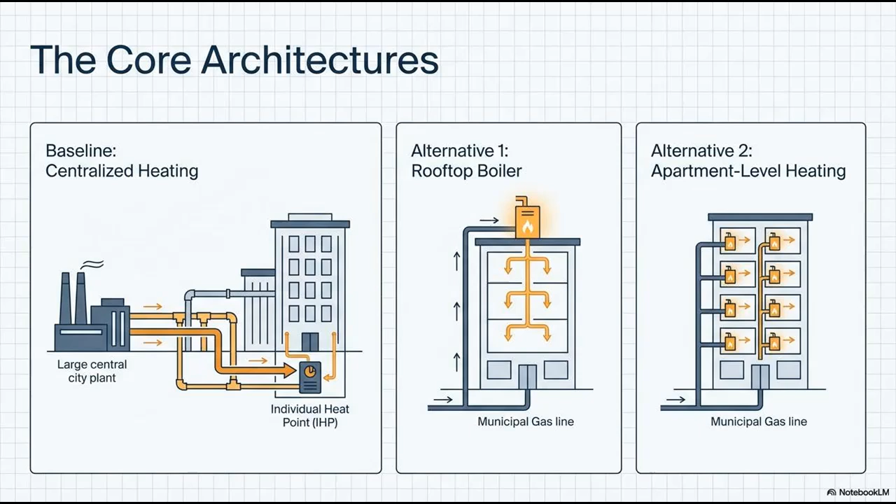But to make this function, the city has to build and maintain miles of heavily insulated underground pipes. Inside your building's basement, you install an individual heat point, an IHP, which regulates the immense pressure and temperature of the incoming city water down to a level that's safe for your residential radiators. The text notes a base case could technically be reconstructing an ancient neighborhood boiler, but for our deep dive today, that classic centralized city grid is the baseline.

Against that, we have alternative one, the roof boiler house. This is autonomous heating, but scaled for the entire building. The building acts as its own mini city. You bypass the municipal heat network entirely, install a heavy-duty commercial boiler right on the roof of the residential tower, run high-capacity gas lines up to it, and the building generates its own heat internally.

And then we have alternative two, which takes the decentralization all the way down to the studs: apartment level autonomous heating. Every single unit in the building just fends for itself with its own wall-mounted heat source. Total independence.

To picture this hierarchy, I like to think about it like transportation. Centralized heating is like the city bus. It requires massive shared infrastructure, runs on a rigid schedule dictated by the city, and you share the cost with everyone, whether you ride it every day or not. That's a really good analogy.

Alternative one, the roof boiler, functions more like an apartment building pooling their money to buy a shared neighborhood shuttle. It's dedicated strictly to your building's residents, operates on your schedule, but all the tenants still have to chip in collectively for the gas, the maintenance, the driver. And then alternative two, the apartment level boiler, is like owning your own personal car.

You have total, absolute control. You can blast the heat in October if you want to. But you're buying the engine, the fuel, the tires, and paying the mechanic all on your own. You're paying for all of it.

And these three specific options represent the macro, the mezzo, and the micro approaches to energy distribution. Tracking the math across these three tiers shows you exactly how the economic burden shifts as you decentralize the system, moving from the state to the local community board right down to the individual homeowner.

So we have our three contenders: the bus, the shuttle, and the car. How do engineers actually crown a winner? Because you can't just look at a monthly gas bill, shrug, and say one's cheaper. No, definitely not. There's a massive hidden life cycle to these systems.

The text introduces the ultimate engineering equalizer for this, which is Formula 1.1. It calculates what they call reduced costs, or CPR. The reduced cost formula is really the bedrock of this kind of economic evaluation. It forces developers to look at the entire financial picture over time rather than just the immediate sticker shock.

The formula dictates that reduced costs equals operating expenses plus discounted capital expenses. Let's break that down. Capital expenses, that's the upfront hit - the massive check you write on day one to buy the equipment, dig the trenches, weld the pipes. And operating expenses, that's the annual bleed - the cost of buying the fuel and maintaining the equipment year after year.

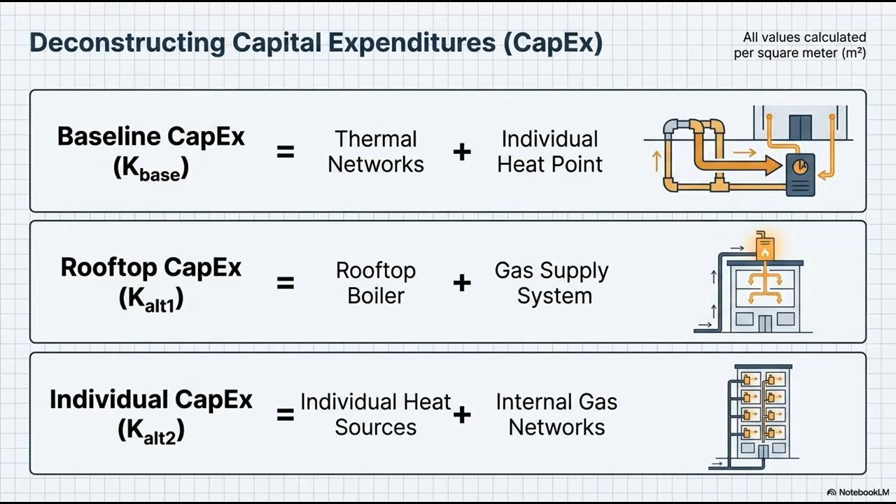But the trick in this formula is how they handle the capital. They multiply it by a discount coefficient, a little lowercase e, and the source text specifically mandates this coefficient is locked in at 0.08, based on the industrial construction instructions.

But wait, isn't a fixed 0.08 discount rate kind of arbitrary? I mean, real-world inflation, bank interest rates, global energy prices, they fluctuate wildly. Why use a flat mandated number to decide a building's fate?

Well, what's fascinating here is that if you let every developer or local politician use their own custom projected discount rate, they're going to manipulate the math to justify whichever system benefits them most in the short term. Oh, so they just cook the books. Exactly. The 0.08 coefficient acts as a forced standardized anchor.

Think of it through the concept of the time value of money. Let's say a centralized heating system requires like $1 million more in upfront capital than a simple roof boiler. If you didn't spend that $1 million on basement regulators and underground trenches, you could theoretically leave it in an index fund earning, say, an 8% return annually. So that 8% lost opportunity, the money you aren't making because you buried your cash in infrastructure, has to be mathematically accounted for as a continuous cost of choosing the more expensive system.

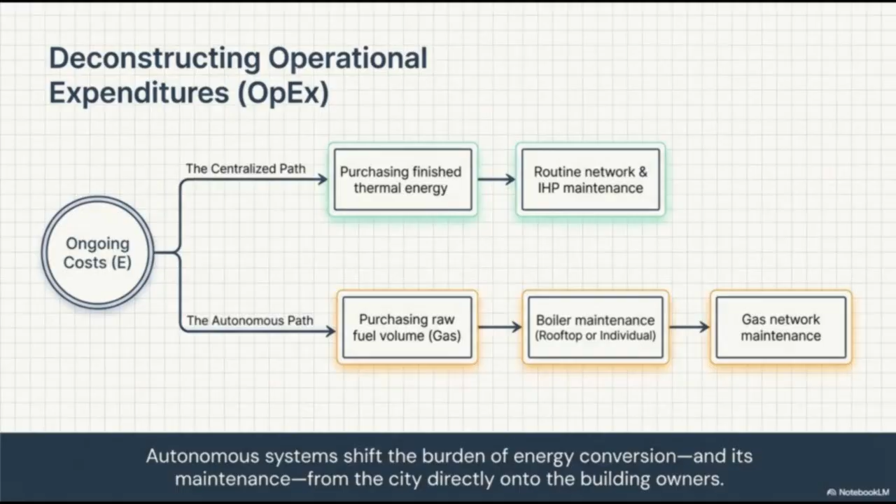It forces an apples-to-apples comparison by balancing the heavy weight of immediate construction against decades of slowly burning fuel. Exactly. So now we have to look at what actually goes into those buckets, what makes up the capital and operating costs for our three contenders.

The text drills down into the specific physical components, calculating everything per square meter of the building, which keeps the scale perfectly fair, whether it's a small complex or a massive skyscraper.

So for the central heating baseline, your capital investment involves digging up the street to lay the network pipes connecting your building to the municipal grid, plus the cost of that complex IHP down in the basement. And that IHP is not a cheap piece of hardware - it requires high-end heat exchangers, commercial-grade pumps, automated sensors, all to take superheated, highly pressurized city water and safely transfer that thermal energy to the building's internal loop.

Okay, and for alternative one, the roof boiler, the capital skips the street trenches entirely, right? Right. Instead, you're paying for a massive industrial boiler hoisted onto the roof, plus the heavy-duty reinforced gas supply lines running all the way up the side of the building.

And then for alternative two, the apartment model, the capital is just dozens of individual smaller boilers for every single unit, plus that maze-like network of gas pipes running through all the internal walls of the building to reach each kitchen. Exactly. Now, if we look at the operating cost bucket for central heating, your operating expenses are dictated by the total annual heat consumption of the building multiplied by the specific tariff or the price of finished city heat.

Plus network maintenance, right? Yes, network and ITP maintenance. But for the autonomous options, you aren't buying finished heat anymore, you're buying the raw ingredient. So your operating costs rely heavily on the total volume of raw gas you pump into the building, multiplied by the market price of gas, plus the maintenance for your boilers.

It's exactly like the classic printer and ink business model. Oh, the initial hardware versus the consumable. Right. Central heating has massive upfront printer costs, laying municipal pipe, the giant basement heat exchanger. But the real danger is the ink, the specific cost of that city heat.

Because the municipality holds a monopoly on the ink. Exactly. If they double the price of city heat because their aging plant is inefficient, you have no choice but to pay it. But with the autonomous systems, you buy a slightly more expensive printer for your roof, but you get to buy raw, unrefined ink, natural gas, at bulk market rates. That's a very effective way to visualize it.

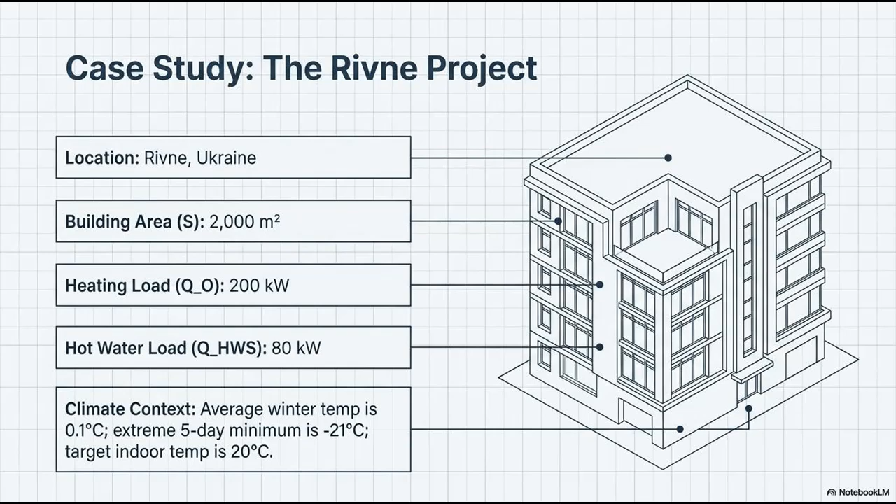When you buy city heat, you're paying a premium, but you're outsourcing the headaches. If a municipal pump fails at 2 a.m. in a blizzard, the city dispatches a crew to freeze in the street and fix it. But if you have a roof boiler, and your primary pump cracks in January, the building's residents are suddenly scrambling to find and pay a private emergency technician out of pocket.

People routinely ignore this massive liability shift when they just look at how cheap natural gas is. You're taking on the total liability along with the total control.

But a formula is just abstract theory. Does this actually hold up when a real building is facing sub-zero winter temperatures? Well, to prove the methodology, the engineers actually tested this on a concrete, real-world case study: a 5-story residential building located in the city of Rivne, Ukraine.

Okay, so the specifications for this Rivne experiment ground the math in reality. The building has a total area of 2,000 square meters, and the engineering target is to maintain an internal temperature of 20 degrees Celsius, which is about 68 degrees Fahrenheit, across all the apartments.

But the climate outside is the real antagonist here. Rivne's average outside winter temperature hovers just above freezing at 0.1 degrees Celsius. But engineers don't build for averages, do they? No, they build for extremes.

They have to design this system to survive a worst-case scenario: a brutal 5-day stretch where the temperature plummets to negative 21 degrees Celsius, that is nearly 6 degrees below 0 Fahrenheit. And this isn't just a brief cold snap. The official heating season lasts 182 days, 24 hours a day. Half the year is spent actively fighting off the freezing cold.

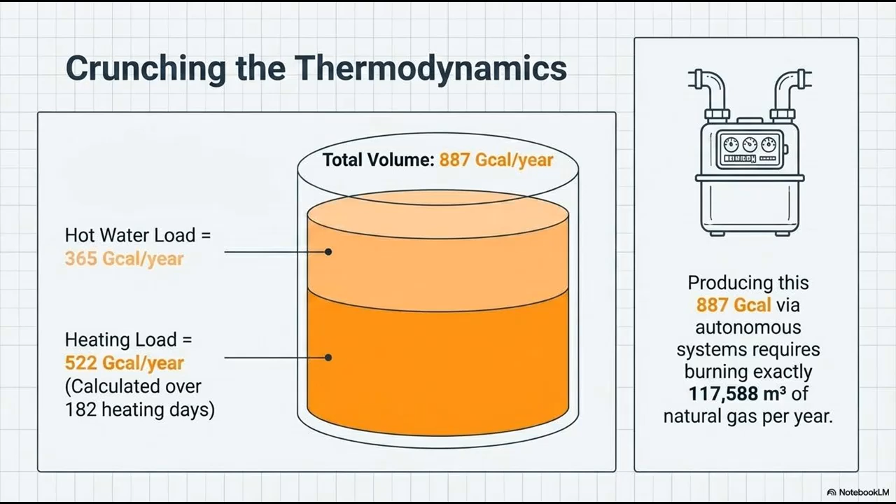Exactly. So the engineers calculate the physical demands. They figure out that just to fight off the winter and keep the building at 20 degrees Celsius, they need 200 kilowatts of heating power. But the residents also need hot water for showers, washing machines, and sinks, and that requires another 80 kilowatts of power.

So they run these demands through the calendar year to find the total energy needed in gigacalories. And for context, a gigacalorie is a massive unit of thermal energy. It's the amount of heat required to raise the temperature of 1 million kilograms of water by 1 degree Celsius.

It seems completely backward, I know. Until you factor in the physical properties of water and human lifestyle habits. Space heating is fighting a dramatic temperature difference, but it's fundamentally a seasonal sprint. It only runs for those 182 days.

And it's fighting an average outdoor temperature of 0.1 degrees Celsius, not the negative 21 degree extreme every day. Plus, once a well-insulated building is warm, it retains a significant amount of that thermal mass. You're basically just topping off the heat. So once the walls are warm, you kind of coast a bit.

Yes, but hot water, that is a brutal, relentless marathon. It is a 365-day demand. Think about the physics: you're pulling fresh water from municipal underground pipes that might be sitting at a freezing 5 or 10 degrees Celsius. You have to instantaneously heat that dense, heavy liquid up to 55 or 60 degrees Celsius for a scalding shower. And you don't retain any of that heat, it immediately washes down the drain.

And the next person who turns on the tap requires the system to start all over again with freezing groundwater. This perfectly highlights how daily human habits, 30-minute showers in July, running the dishwasher twice a day, drive urban energy consumption just as much, if not more, than the local weather patterns.

That is genuinely staggering. We view the winter as the great energy enemy, but we're actually battling our own relentless demand for a hot shower in the middle of summer.

So to produce this massive 887 gigacalorie demand autonomously, the source calculates the building will have to burn over 117,000 cubic meters of raw natural gas.

So we finally have all the variables to settle the debate. We have the physical demands, the climate data, and the fuel volume. Now the engineers run the Rivne building's actual numbers through Formula 1.1 to declare an economic winner between central heating and the roof boiler.

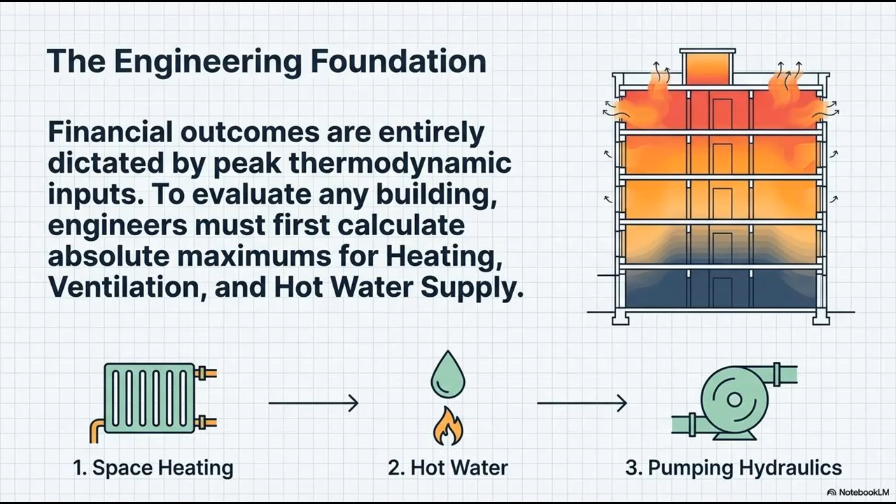Okay, let's look at the results. The text uses Ukrainian hryvnia, but what really matters to you listening is the massive ratio between the two systems.

The central network requires an absolutely massive upfront capital investment. Per square meter, you're paying nearly double the upfront cost to connect to the city grid and install that basement regulator compared to just buying the roof boiler. The capital difference is staggering.

But the operating costs are where the central system truly punishes the building. Because you're forced to purchase finished, marked-up city heat from a municipal monopoly, the operating cost per square meter is astronomical. The monthly operating costs for the central system are nearly 7 times higher than buying raw gas for a roof boiler. 7 times higher just to run it.

So we plug these ratios back into the magic reduced cost formula: operating plus 0.08 times capital. The central system comes out to roughly 13,265 hryvnia per square meter in reduced life cycle costs. But the roof boiler comes out to a beautifully low reduced cost of just 489 hryvnia per square meter. It's a fraction of the cost over its lifespan.

And this brings the engineers to their final verdict. The text defines profit as the mathematical savings generated against the central pipeline. By subtracting the roof boiler's reduced cost from the central heating's cost, the roof boiler generates a massive profit of 876 hryvnia per square meter for the building.

I want to clarify this concept of profit, because the engineering terminology can be a bit misleading here. This profit is not a physical check that the gas company hands you at the end of the year. Nobody's getting rich off this. It's captured savings — it's money not burned in the furnace.

It's exactly like finally cutting a massive $200 a month cable television subscription and switching to a $15 streaming service. You don't magically get a raise at work, but your bank account completely stops bleeding every month.

And if we connect this to the bigger picture, that captured savings is the critical metric. The engineering text introduces Formula 1.2 here, which is the payback period. Developers take that massive pool of captured savings, that profit per square meter, and use it to calculate exactly how many years it will take for the roof boiler to literally pay for its own initial installation.

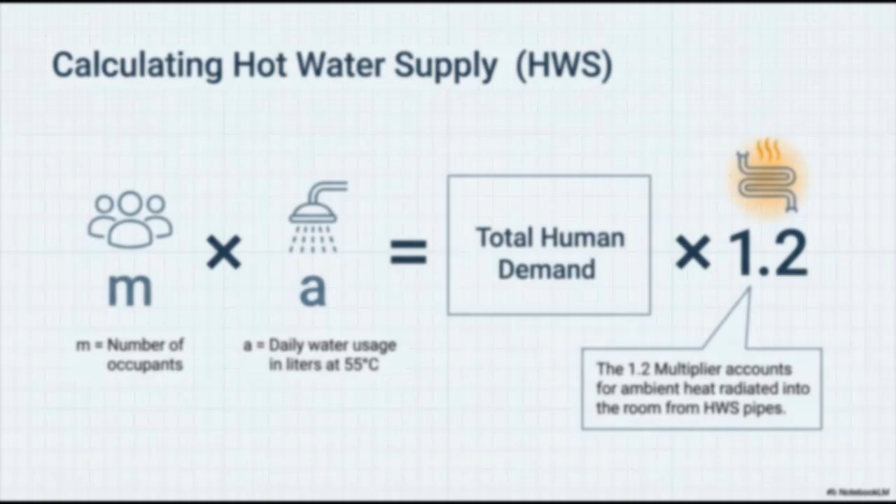Because the operating costs of raw gas are so incredibly low compared to city heat, the roof boiler pays off its upfront capital in record time. The math in the text is undeniable. In this specific economic scenario, the autonomous roof boiler absolutely crushes the central heating system. The neighborhood shuttle destroys the city bus.

So what does this actually mean for you? Whether you're renting an apartment, buying a new house, or sitting on your local HOA board, the way your building generates heat dictates a massive, often completely invisible portion of your daily living expenses. Understanding the relationship between the upfront capital, the printer, and the long-term operating costs, the ink, makes you an empowered consumer. You stop looking just at the superficial monthly bill, and start looking at the hidden life cycle of the infrastructure you're buying into. It changes how you evaluate real estate and urban living.

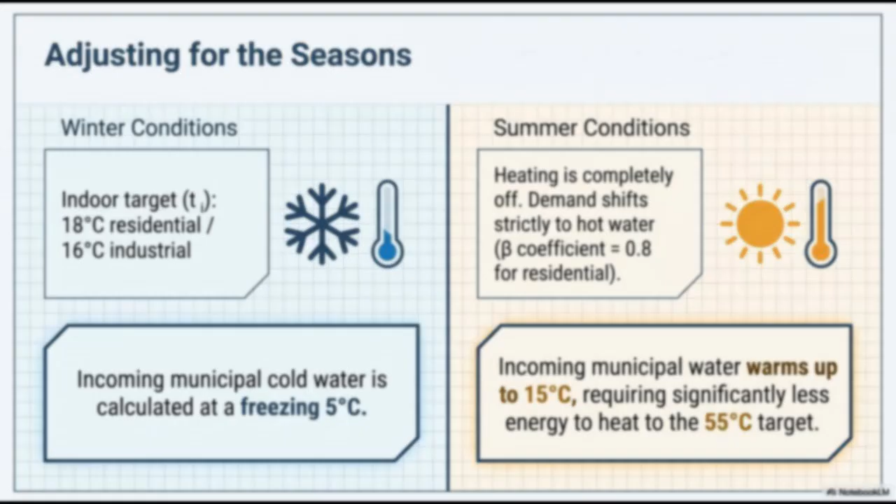But the undeniable victory of the roof boiler raises an incredibly provocative final thought. We just proved mathematically that autonomous heating is vastly superior in terms of cost and efficiency for the individual building. The smart money, the rational economic decision, is to cut the cord and disconnect from the city. But what happens to the larger city infrastructure when all the profitable, efficient, well-managed buildings realize this and actually do disconnect from the central grid?

Well, you trigger what economists and urban planners call a utility death spiral. The massive municipal heating plant still has enormous fixed costs. It still has to burn fuel, employ technicians, and maintain miles of degrading underground pipes.

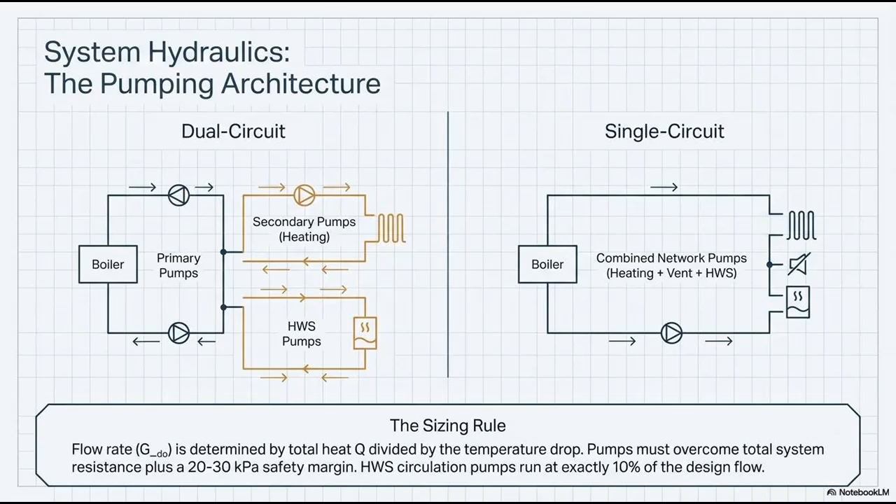And if the wealthy, organized buildings leave the grid to save money with roof boilers, the city loses its best-paying customers. So to cover those massive fixed costs, the city has no choice but to raise the price of city heat for everyone who's left on the grid. Which makes the ink even more expensive, causing even more buildings to realize the math makes sense to leave. It creates a feedback loop.

Until eventually, you're left with only the poorest, oldest, most underfunded buildings, the ones that literally cannot afford the upfront capital to buy their own roof boilers, carrying the entire financial burden of an aging, oversized, inefficient central grid. It's a really harsh reality. Is the cold, hard math of individual efficiency accidentally creating a citywide crisis?

By rationally optimizing our own little vertical monuments to save a few dollars, are we inadvertently destroying those hidden underground veins that once kept the entire city alive? It's definitely something for you to think about the next time you hear the radiator hiss and turn up the thermostat.